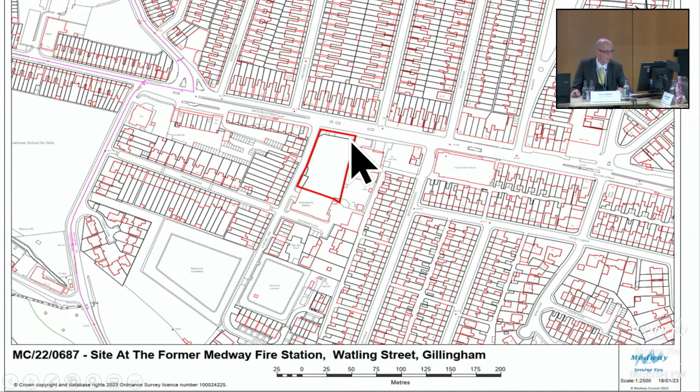An aerial photograph shows that the former fire station has been demolished on the site, but it shows where the access from Star Mill Lane was into the car parking area to the rear.

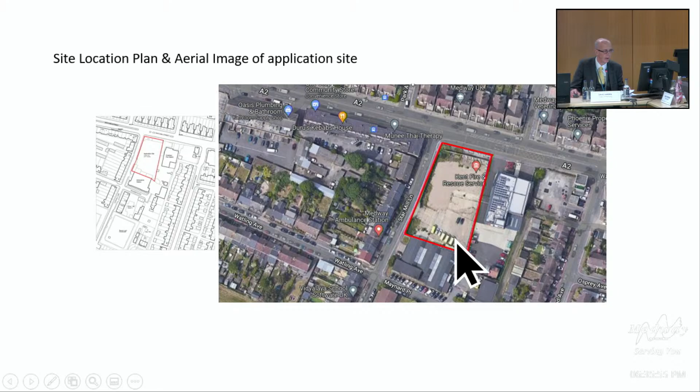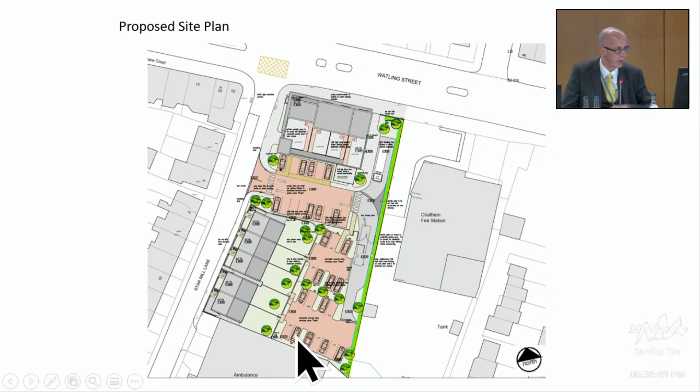The proposal is for a small mini supermarket on the ground floor fronting onto Watling Street, with 4 two-bed maisonettes above, a car parking area to the back with 15 spaces to serve the supermarket, a servicing area, and access to the rear for a car parking area serving the residential flats above, plus 5 three-bedroom properties fronting onto Star Mill Lane. There'll be a gate so that car parking area is restricted to resident parking only, with 18 spaces serving the 9 units. Here's the floor area.

That's the small supermarket just in there, with the car parking area to the rear. We feel the 15 spaces are adequate to serve a supermarket of this size. People parking there will walk around to the entrance of the supermarket.

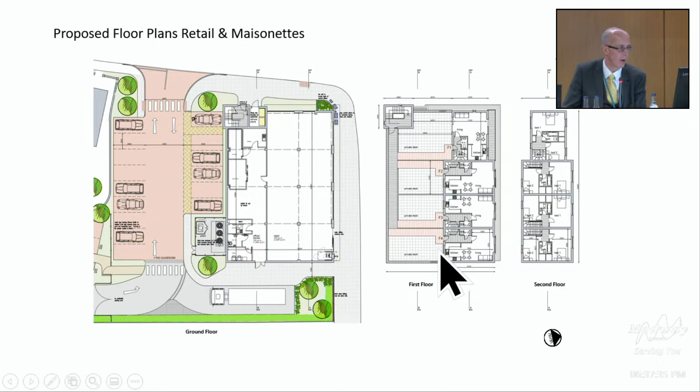In terms of the maisonettes above, there'll be a stairwell coming up to the access at the back. They're spread over 2 levels with two bedrooms, and each will have a small amenity area to the rear, common in maisonettes such as this.

Looking down Star Mill Lane, there's a terrace of 3 properties and a pair of semi-detached, all 3-bedroomed, with gardens that meet our standards in terms of amenity.

In relation to design, the photographs show that the parade on the opposite side, which is 3-storey with retail on the ground floor, is reflected here with the maisonettes above.

And then you've got that amenity area just to the rear here, and that's where that stairwell is. So we think it fits in with the general street scene, provides a good level of amenity for prospective occupiers, and the access and car parking is suitable to serve both the commercial and the residential, meeting our standards as well.

All the car parking for the residential will have EV charging points, with a third of the commercial having EV charging, with the remaining two-thirds having the passive provision, i.e. they have the potential for EV charging in the future.

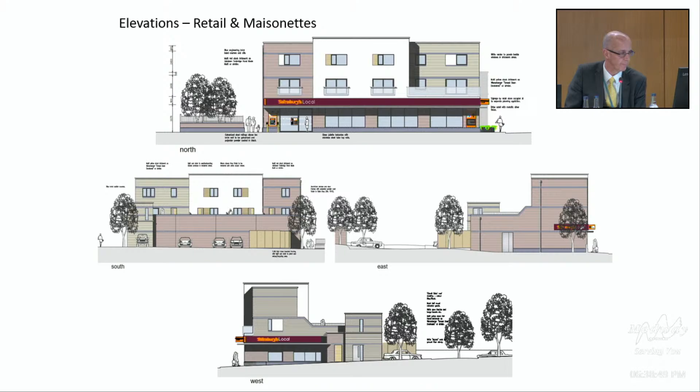Then going to the elevations of the houses, that's the elevation fronting onto Star Mill Lane. We feel that design is appropriate, two-storey, to fit in with the street scene, and the materials, which will be controlled by condition, will ensure that it fits in design-wise.

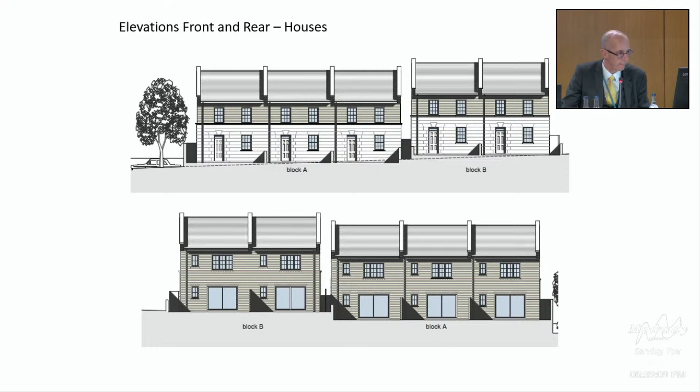And then some street scenes. So that point I was saying in terms of the existing parade here and how you can see that crosses Star Mill, that height-wise it fits in, and then you've got the fire station here and the Camping International just down there. So it fits in with that Watling street scene, and then you can see the street scene going along Star Mill Lane, going down to the ambulance station there.

We feel this is a good scheme and will provide for a valuable local facility which meets our policy guidance, and we're recommending it for approval, subject to the conditions as set out, as well as the usual bird contribution. Thank you, Chairman.

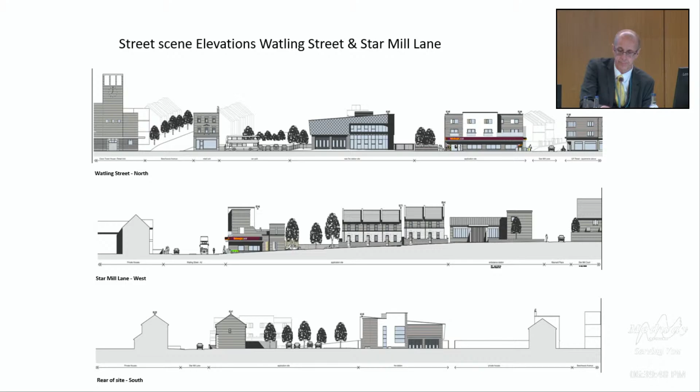Members? Councillor Hackwell. Thank you, Chair. Just a question, really.

How will the car park be policed at the rear? Because there's already car parking pressures along those streets. If you drive up Star Mill Lane, you will only see cars nose to tail parked outside the residents' houses. And as you pointed out in your presentation, there's lots of retail options along that high street for the people. So how will that be managed? Because I just fear it will become blocked with residents' car parking and won't be available for the supermarket.

Chairman, thank you. Good question. It's similar to a supermarket quite close to me down in Wainscott, the Co-op down there, where it's policed by the supermarket themselves. They have signs up, they make sure they've got CCTV, and they make sure that people parking there come in and use the supermarket. So it's policed by them. Notwithstanding that, we do have a traffic management condition, a parking management condition, so they'll need to submit further details relating to that.

I have two councillors who've indicated, Councillor Potter and then Councillor Curry. I think Councillor Crowther as well.

It does indicate - you've shown one example there with very, very minimal landscaping going on, and with some of the renderings it's showing these sort of mature trees, but those trees are fake, aren't they, because they're not actually there at the moment, and they'll take many, many years before they look like a mature tree. So I'd like to see more on the landscaping side of things. Again, not a material reason not to support this tonight, but if your officers could do some work on that, I would appreciate it. Thank you.

Councillor Curry. Thank you, Chair, and thank you very much for the presentation. I'm just following on from Councillor Potter's point, really, on a couple of things. I think this is a very prominent site, and it's really welcome that it's being occupied so quickly since the fire station was moved, which is encouraging. But this is actually, I think the front design in particular, of obviously importance to the area.

It's made of the bricks and materials used in the development, but I think special attention needs to be given to whether it will have a curved frontage on the corner where it turns into the side road, mirroring what's on the other side of the road. A bit more care on the design would have been helpful, and there's room on the front with a wide pavement for some street trees, which would soften the impact of the building. Just a couple of points on the design from that point of view.

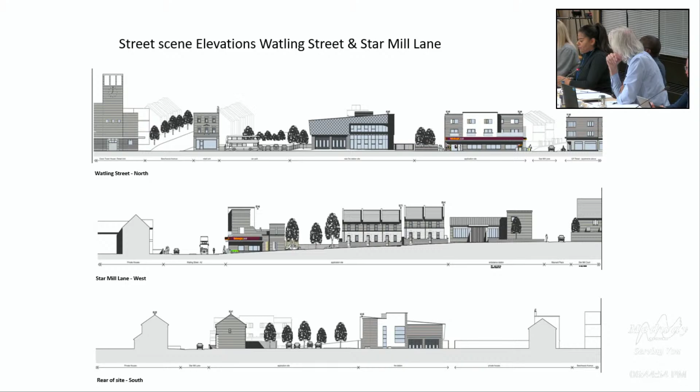Chairman, I understand the point Councillor Crozer is making. We do feel the design is appropriate for the area, and consideration has been given to height and scale. There are conditions regarding materials, and we feel this will fit in with the street scene. If you'd seen the photographs shown further down, the fire station was specifically designed to stand out on its own merits. It's not a conservation area, so there's nothing we need to replicate there. But in terms of scale, materials, and design, I feel it's fine in the area. Thank you.

I haven't got anybody else that's indicated. Can I just raise the issue?

On page 34, it talks about the noise assessment and the delivery noise assessment. What I can't find in the conditions is any hours of operation for the retail use. The only way to control the noise from parking is to control the hours that they... is it there? I've gone all through, and you're going to tell me it's there. All right, okay, missed it.

Thank you, Chairman. This application is for the demolition of the existing dwelling and associated buildings, and for the erection of 20 dwellings, access, parking, play provision and landscaping. This is the site outlined in red, within a residential area, so the principle of residential development there is considered acceptable. This is the aerial photograph of the site, showing its extent - currently occupied by just one dwelling house. This is North Dane Way running along here, Setford Road here, then Lordswood Lane and Swift Crescent there.

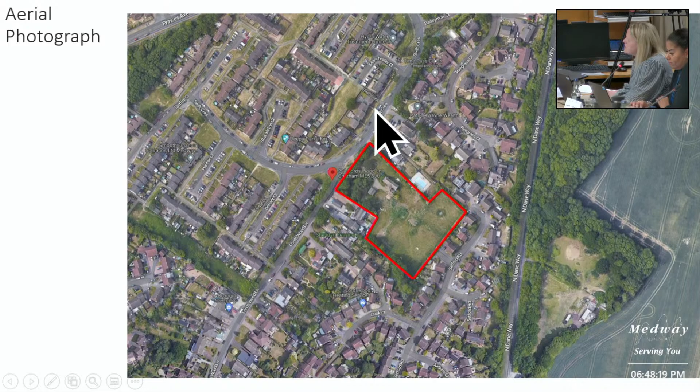Oh, it's quite sensitive, sorry. Oh, I'm going the wrong way. Let me just find myself, there we go.

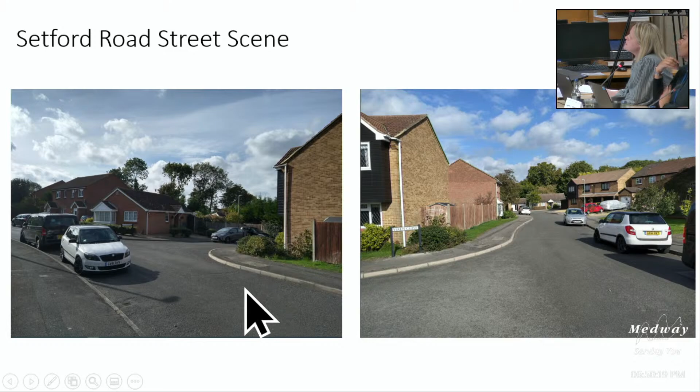And then just in the street scene of Setford Road, so this is Vixen Close, a very small close. This is where the access would be going into the back of the site. A couple more pictures showing Setford Road, Vixen Close off to the left, looking back towards the Setford Road street scene, and then standing looking across to Vixen Close there.

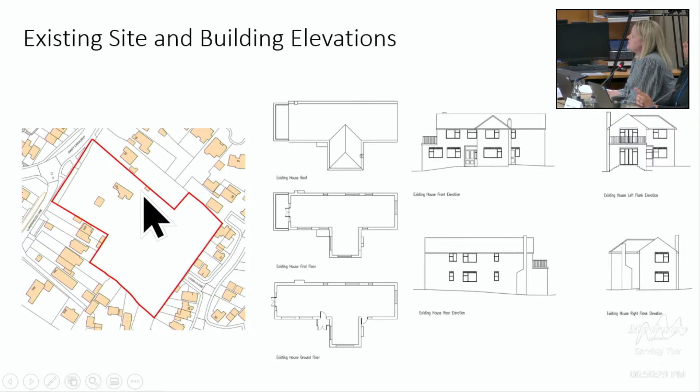And then we move on to the plans where you can see the extent of the curtilage is quite large, so the existing dwelling house there, and this is what it currently looks like, the floor plans and elevations. So it's actually quite hidden from the street scene.

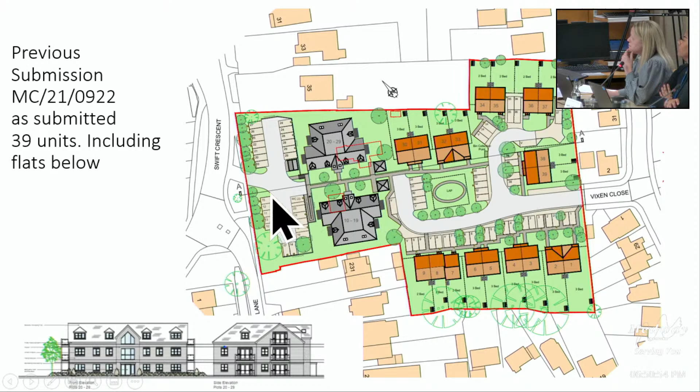This gives you an idea of the starting point when the application first came in for this site. It was a different application, starting with 39 units, 2 blocks of flats, and some dwelling houses to the rear accessed from Vixen Close, and others accessed from Swift Crescent. It was negotiated down to 24 units to try and address our concerns, but we still weren't happy, and this application got withdrawn.

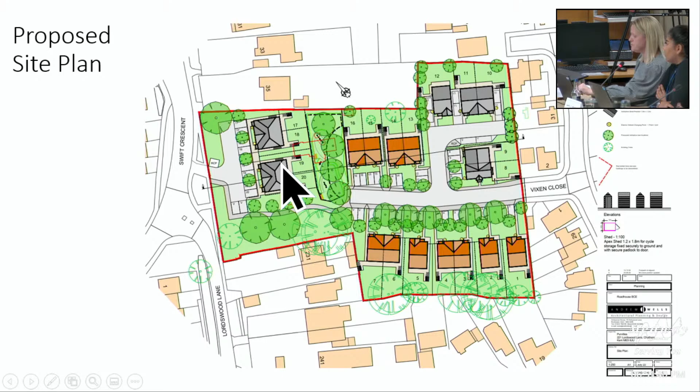Just so it's easier to compare, you can see all 3 schemes side by side with the issues. This one had big concerns with the number of flats and the dominance of parking overall in the layout, and not enough landscaping — we felt there were far too many units on this site. Trying to address those concerns, they removed the flats, but the car parking became even more dominant, with even less landscaping than before. We still felt there were too many units, and the relationship between these properties and this one was too close in our opinion — this is someone's back garden here.

Those concerns were expressed, and we've ended up with this scheme, which we're happy with — no flats to the front, all dwelling houses across the site, as previously said. The landscaping is integrated with the parking so it's less dominant, and there's a better relationship with neighbouring properties in terms of the layout.

All of those rear gardens meet the depths for Medway housing standards. Then looking at building heights, which has been raised as an issue in consultation responses — all the pink ones are 2-storey, and as mentioned, these are split level, 3-storey to the front and 2-storey to the rear. Both are set off the boundary, significantly set off here, but more in line with this one, so it isn't dominating that neighbouring property.

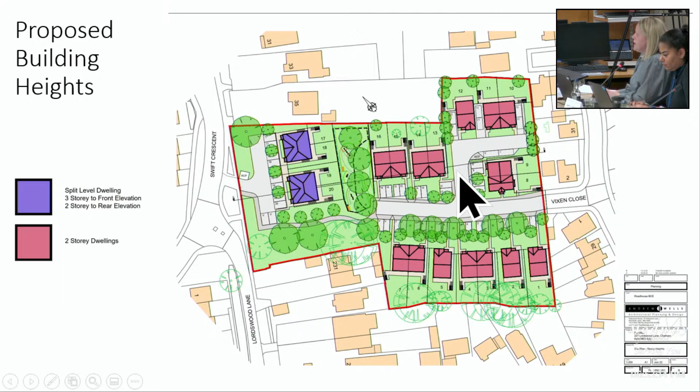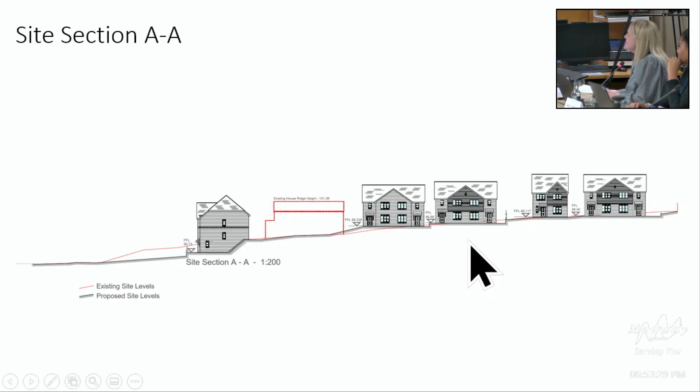My hand, I can't keep it steady, it's too sensitive. But if you can see the red line and then the proposed levels, there isn't a significant difference across the site in the main. The significant difference is down here, but what's happening there is it's at a lower level than the existing line, which is up here.

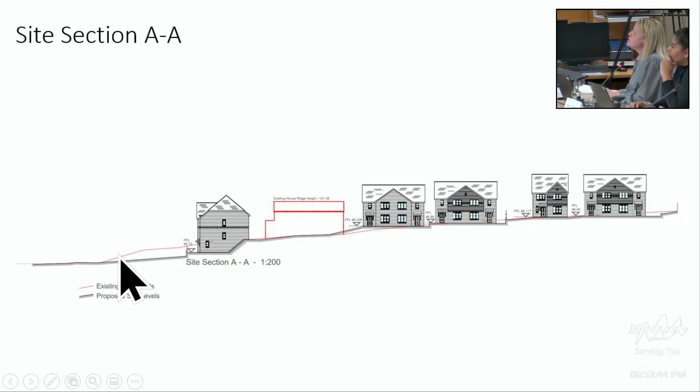And then we move to the elevations. There's a blue cross on each of these to indicate what the elevations and floor plans look like for these properties - plots 1, 2, 5 and 12, 4-bedroom detached houses.

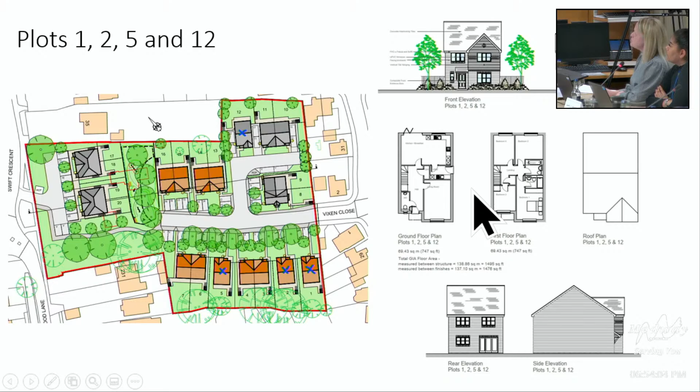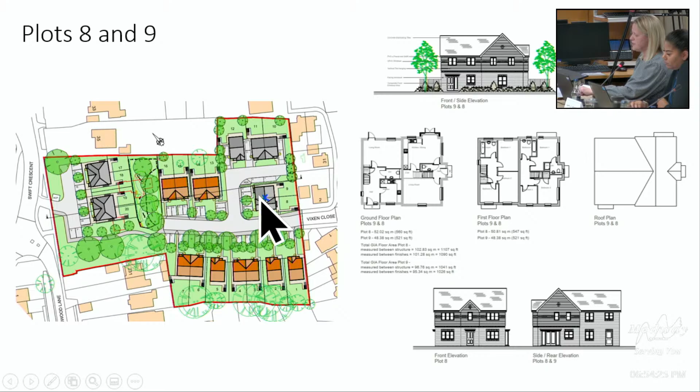I won't read all those, you can read them yourselves, but these are for the next group, which are 3-bed semi-detached houses. Plots 8 and 9 are also 3-bed semi-detached houses - those two there as you come into the entrance.

And then the ones at the front, access from Swift Crescent, are the split level 3-storey, 2-storey, 4-bed semi-detached houses. In terms of design, it's quite varied in the street scene along Lordswood Lane, Swift Crescent and Setford Road. There's no objection from the officer's point of view in terms of housing type and architecture, and they all meet national space standards.

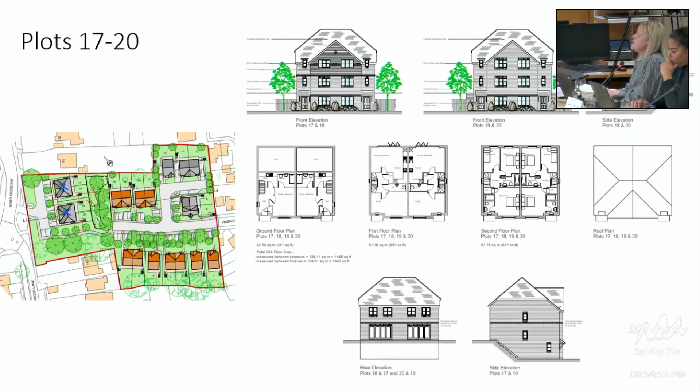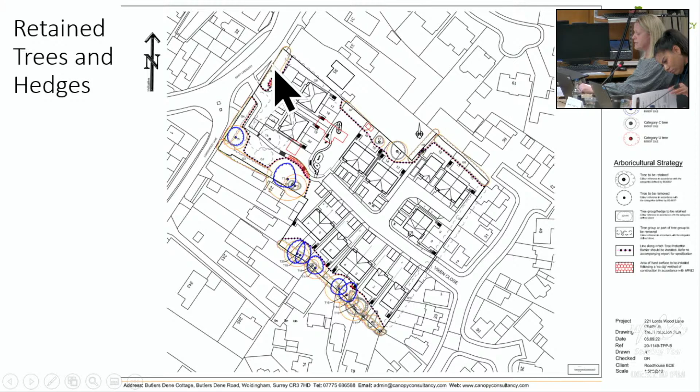There are conditions to require further landscape detail because we want to include more ecological mitigation measures. If you've read the report, there is a loss in terms of the biodiversity net gain calculation, but there are street trees included, and we would be looking for native species in the landscape.

KCC have asked for that to be included in the detail that comes in, required as part of the condition, and there's also a landscape management condition - these areas are to be managed by a management company, so it secures the street trees that officers managed to secure, sitting between the parking and the curtilage of the residents' properties.

In terms of balancing the loss in the biodiversity net gain calculation, we have to balance that against the 5-year land supply issue that the council has, and that carries significant weight.

Taking account of that, the climate change measures and the landscape details to be secured by condition, and the street trees managed separately - secured long term rather than within the curtilage of individual owners - we are recommending approval, subject to completion of the Section 106 as set out in the report, and the conditions as well. Thank you.

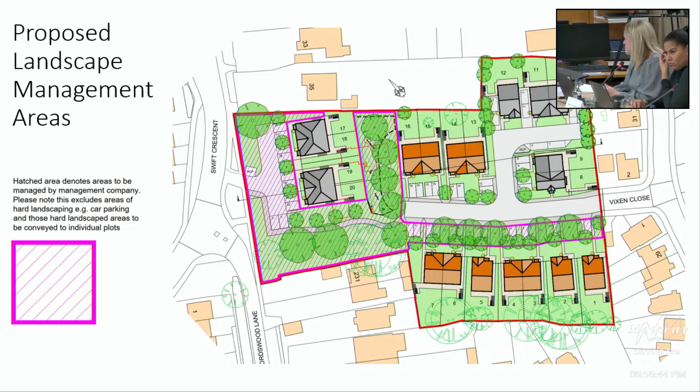Thank you, Carly. Right, I have Councillor Lamas.

Thank you, Chair. I'm very well aware of the over 30 objections that the Planning Committee has received in relation to this site. One of the reasons why I haven't spoken about it publicly before is because I wanted to reserve my opinion for this committee. You will also be aware, Chairman, that in this committee we have a quasi-judicial role, and we have to consider applications based on set criteria, so it's not just the case that I can vote against things in my backyard, so to speak. As a fellow resident of 288 Lordswood Lane, this is a site I know extremely well in Princes Park.

I'd like to ask some questions, if I may, to Dave Harris, the head of planning, just to get his assurance on some of the things residents have raised. And then I'd like to have a brief discussion about Section 106 funding, if that's okay with you, Chair.

The first one is that the trees are crucial for this site to be viable in terms of not overly impacting the street scene. What assurances can you give that the trees, particularly running along Swift Crescent Road and along that southern boundary, will be maintained so that the look of the site won't overwhelmingly change?

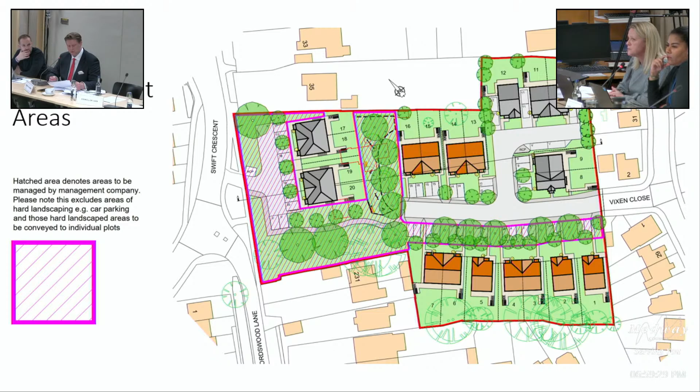The residents of Vixen Close will probably be more concerned about this application than those of Swift Crescent, because that's almost like a close-knit community, and this would be a significant change for them to interpret. However, you'll be aware, Chairman, of Section 106 funding, which is essentially money the developer gives upon completion of the project to improve the local community and mitigate against the effects they may have. That's where my main concerns lie with this application.

Princes Park needs more bins, more trees, and we also have two local issues that need funding. So I'd like to ask what measures can be taken in the Section 106 funding to give less money to far-flung places such as Great Lines Heritage Park, and more emphasis on two local issues: the Kingfisher Playground, in the valley next to Kingfisher Drive, and the Kingfisher Underpass. These are two very local projects needing funding. Could these be a community benefit alongside more trees, more bins, and money for additional school places and healthcare access, as a result of this development if approved by this committee?

Chairman, if I can answer that - I'll discuss this with Carly, but also with Fiona Ledley, who's the Green Spaces officer.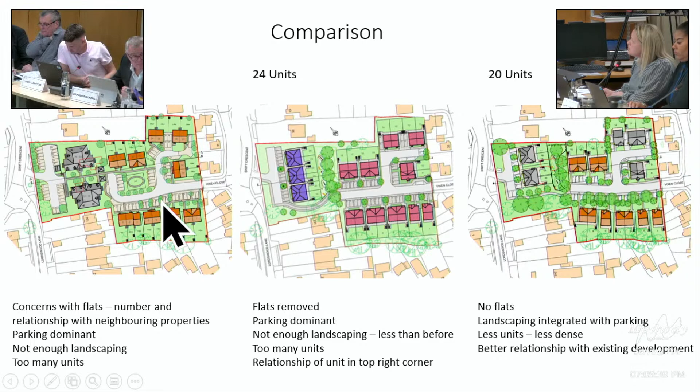It's a bit of a difficult one because, yes, that's what you're referring to, that we've lost. But actually it might be easier to find that scheme. So the current one has more usable space here, which is where the play space was, and we've gained space here.

Whilst we might have lost that, it seems we've lost more because there's actually less car parking dominance here, and we've integrated more landscaping. As I understand it, and Councillor Curry will know more than I do, in terms of BNG in linear form there's an increase, but it's the polygon version where there's a decrease. I'm not sure how that balances out. But could that then be achieved if you reduce the scheme by a couple of dwellings?

Quite possibly, I don't know. That would have to be looked at - it wouldn't be you, it would be the developer who would do that. Whether that makes the scheme unviable or not, I don't know, so that would also potentially come into play. If that's the case, we'd have to get a financial appraisal from them to demonstrate that, but that may be the case. That's down to members to decide whether they're happy with this scheme or want to look at further iterations, if the applicant's willing to.

Chairman, if I can add to that - Carly's put it very well, and this is a really good plan. You can see that the 20 units scheme, with the additional tree planting achieved there over the 39 units, the BNG must be greater for the current scheme. There may be potential for some additional gains in the public realm area - the area that will be managed by the management company - so we can look at that.

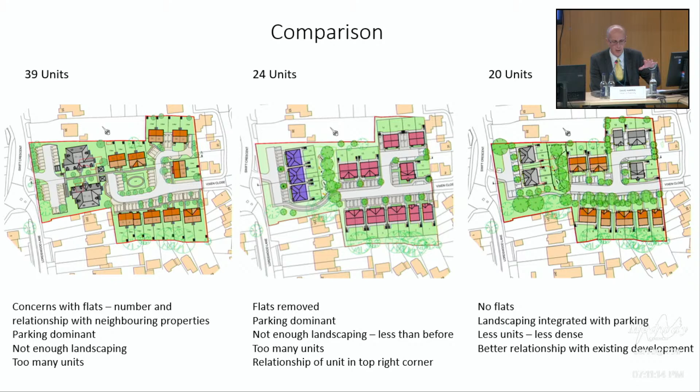But what I would say is that the requirement for 10% biodiversity net gain isn't in force yet, so that weakens that argument. I think Councillor Curry made a very good point, and Councillor Lammas as well, about taking that public realm contribution and using it for additional tree planting in the immediate area, which will help from a BNG point of view.

Moving forward, just to let members know, as we get towards the requirement coming in November for 10% gain, we're working very hard with KCC Ecology. Along with other Kent authorities, we're paying for a BNG officer who's now in post, just started a week or so ago. I'll be meeting them shortly to talk about not only on-site BNG and how we can best deal with that, but also where there are sites where you can't achieve at least 10% BNG on-site, where we'll look to get off-site provision to offset that. Hope that's helpful, Chairman.

Chair, could I just quickly come back - with reference to this specific site tonight, have we had those conversations with the developer to say, actually, you're very close to meeting the net gain requirement with the biodiversity, and if you just came back with a slightly different proposal, you would be there on that? Do we know if they would be willing to do that?

I don't know if officers specifically had that conversation, but conversations have gone on over time in terms of the amount of landscaping they've produced, and the difficulty is what Dave said - the Environment Act doesn't come into force until November 2023, so we can't make them do it at this stage, and they've gone so far as to provide a scheme that we as officers are happy with. So we think the balance is right, and it's up to you to decide whether you agree with that.

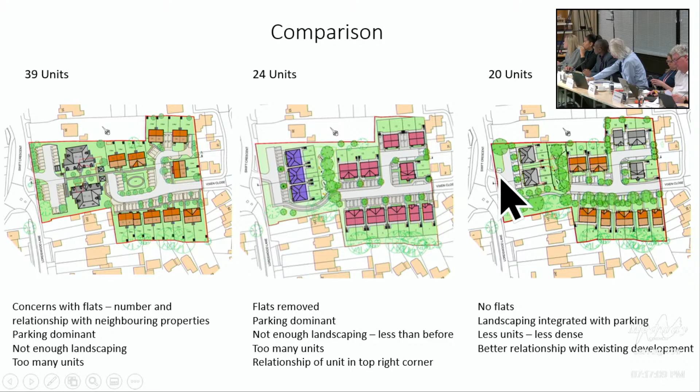On a point of clarity, Chair, if I may, I think what Councillor Crozier is suggesting, which is correct, is that everyone who comes out of the access to Vixen Close will have to drive around in a crescent moon shape, and to get to Morrison's they'll have to go right to that junction. So whichever way they're coming out, which is why my concerns are over that slippery part, they will all encounter that on their way to Morrison's. Yeah, that wasn't my assumption, but I do take that point. But do highways consider the safety of that junction, because it's a slippery junction?

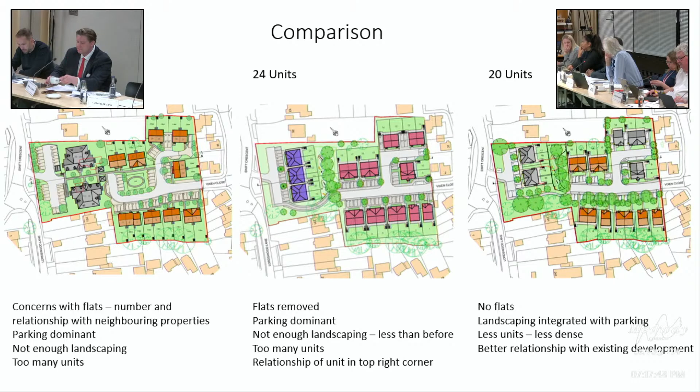I think if there's a concern about slip, I mentioned about putting some anti-skid surface in that junction. But looking at it, I didn't think there were any defects in the road. But if we're concerned about slips and things like that, I think anti-skid surfacing, which we can use as a Section 106 contribution, could actually improve the physical characteristics of the road. Thank you.

Councillor Hackwell. Thank you, Chair. I have a very good friend who lives just a few numbers up from there, so I do use that junction a lot, and actually I think Swift Crescent is ten times worse because the hill's a lot larger. I think it's just a small, tiny little depression. I think the road network there is built in a big valley, all the roads are very steep. I don't think there's a particular concern. I accept your concern about the end of that road, but all the roads around there are very steep, and in snow and ice there are lots of accidents because people drive too fast, normally.

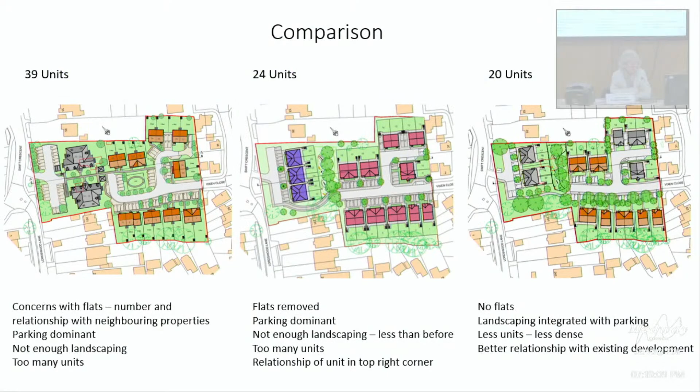I don't have anybody else who's indicated. Just to comment on the fact that we have the comparison chart in front of us - it's very significant, because if you look at what the applications started at and what has now transpired, it's really quite different. It's much, much greener, and I'm not always sure open spaces add that much to biodiversity - sometimes they become scruffy - whereas there's a plan here to maintain these trees because they'll be under a management company. So I think what we started with to what is now before us is a significant improvement.

I'm going to move to the Vice Chairman.

Thank you, Madam Chairman. Colleagues, I take account of the debate, which I think has been very helpful, particularly concerns on the 106 and the sensible need for some more attention to highway and safety issues. So I will move the recommendation, but with some amendment which may incorporate the views reflected by members in the debate. I move recommendations subject to Section 106 before us, but with the following amendment to Section 106, Roman numeral 9, which relates to public realm improvements.

I would amend that to read that they be devoted to areas in the vicinity of the application site, including the potential use of anti-skid surfacing on the highway and incorporating measures to enhance the general safety of the locality. In addition, because it was made earlier and rightly so, the detail of that be subject to professional views and consultation of elected members.

And finally, to make it clear, as we're coming into that dreaded run-up to the 4th of May, that if there has not been an agreement concluded, then the relevant ward members be the 2 new members for Princes Park if there is no agreement by Tuesday the 9th of May.

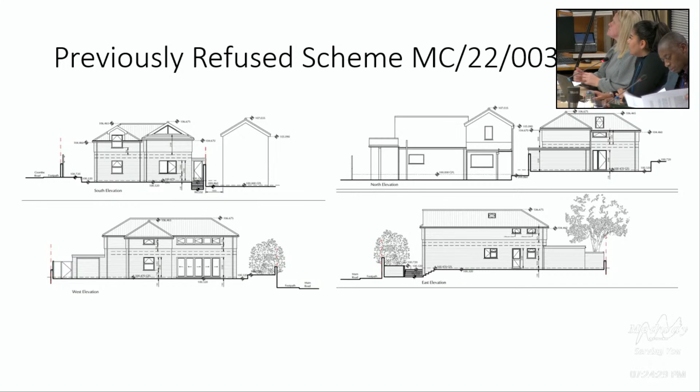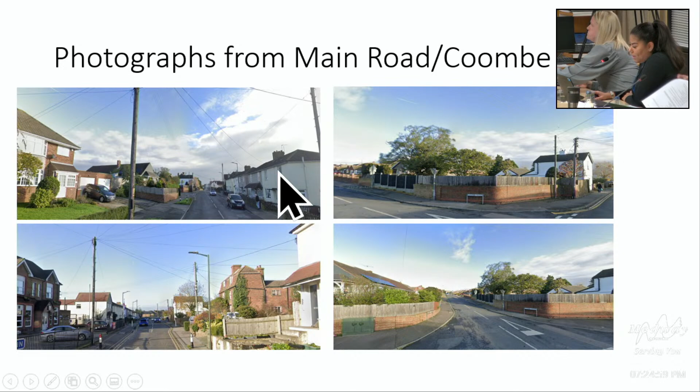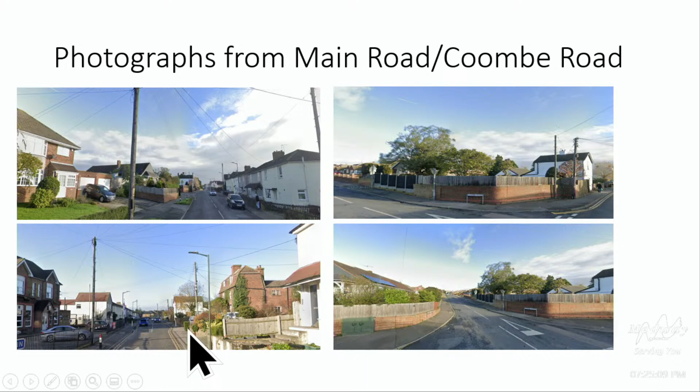So these are some photographs of the area. This is the view from the west, looking down towards the proposal site - this is 42 Main Road here. This is from the east of the site, again you can see 42 Main Road here. You can't really see the proposal site from this side, but just to compare the sizes of the dwellings within the area.

This is the site location within this corner plot, and this is views up towards Coombe Road. So within these photos you can see the relationship between the bungalows within Coombe Road and the two-storey elements along Main Road.

And then these are just some photographs from inside the site. So again, that's 42 Main Road, and this is the corner junction here looking out towards Main Road and Coombe Road here.

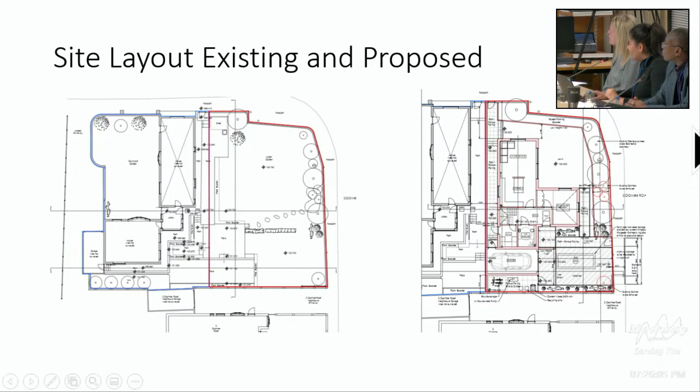Going on to the site layout, this is the existing site layout demonstrating the garden area for 42 Main Road. This is the proposed site layout demonstrating the ground floor, the garden area and the parking provisions within the garage and to the front of the garage there. And this is the access that leads out onto Coombe Road.

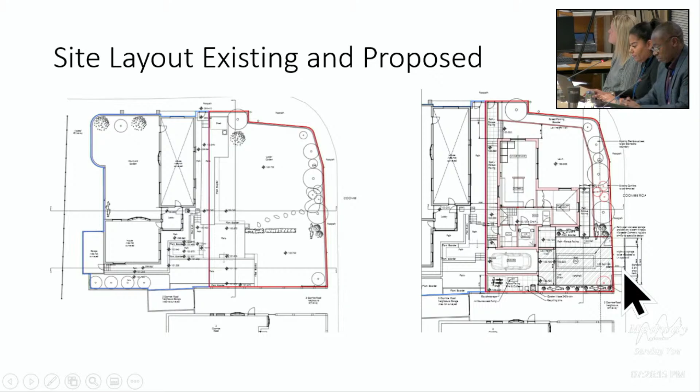Going on to the proposed floor plans. The ground floor would comprise of one bedroom here, a shower room, open plan kitchen, living and dining space. The first floor will comprise of a master bedroom with ensuite and a study on this side.

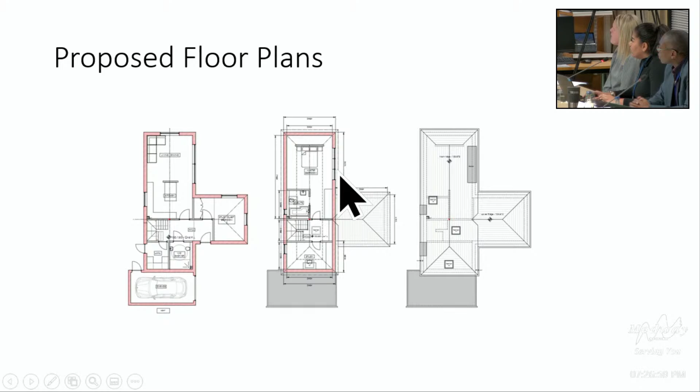In terms of windows and overlooking, these windows have been conditioned to be obscure glaze to mitigate any overlooking into 42 Main Road. And this main window here that serves the master bedroom would overlook the proposed garden of the proposed dwelling.

So here are the elevations when viewed from Main Road. This is 42 Main Road here. These lines helpfully demonstrate the previously refused application. This was a second amendment, which was then further reduced to what you see here.

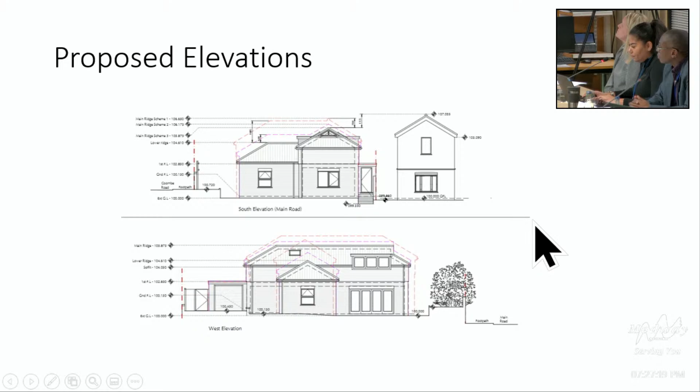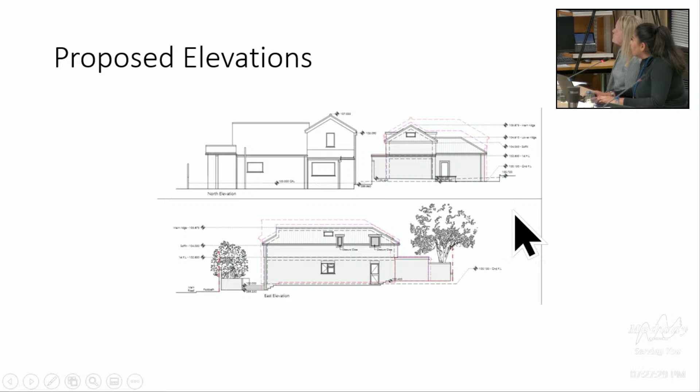This is the view from Coombe Road towards the site. And these are further elevations, the northern elevation and the eastern elevation, again demonstrating the previously refused elevations there.

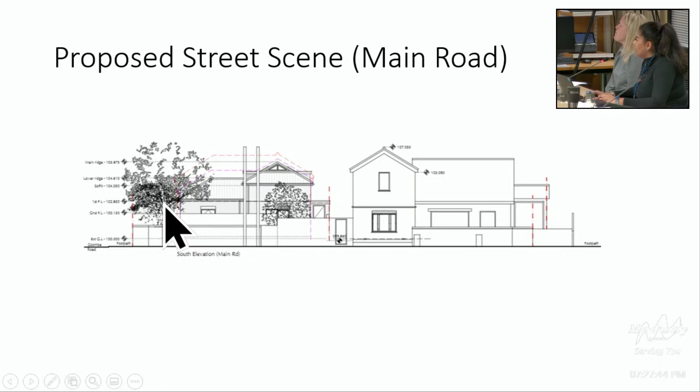And lastly, these are the street scenes. So again, this is 42 Main Road, so just showing it with the boundary treatment and sort of the landscaping that's proposed there. And again, from Coombe Road, demonstrating the relationship between the bungalows there, again, with the boundary treatment and the landscaping.

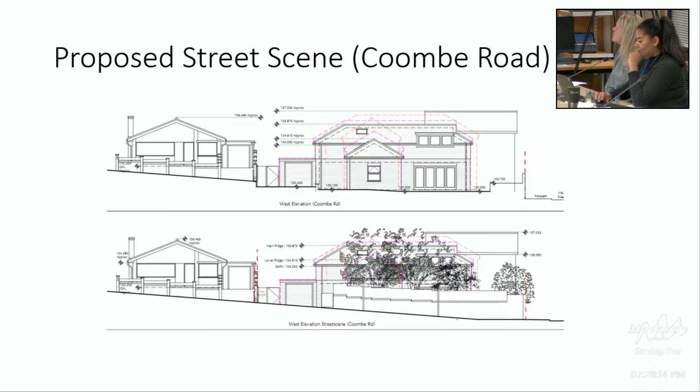Just on to concerns that were raised through letters of objection. As previously stated, the supplementary agenda details the objections from the Parish Council and Councillor Pearce. One of the issues was over-development of the site.

There have been two previous approvals on this site under outline applications for proposed bungalows. When looking at the buildings within the plots, especially within the street scene, the proposed site arrangement is comparable to those on the adjacent side of the road.

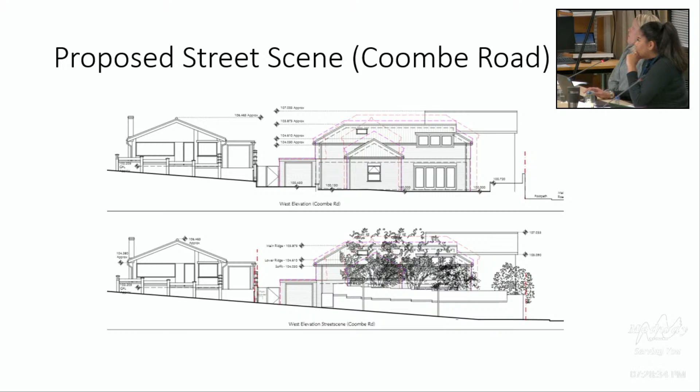So if I just flick back to the site location plan. The proposed chalet bungalow would be set back from both Main Road and Coombe Road, and it wouldn't appear cramped within the plot. As such, it's not considered that the provision of a 2-bedroom chalet bungalow would constitute overdevelopment of the site.

Another main issue that was raised was the relationship with 42 Main Road. It's been listed within the objection that it's a non-designated heritage site. The conservation specialist didn't comment on this planning application, but they did provide comments for the previous application, in which they determined that it was not a non-designated heritage site, and as such there was no requirement for a heritage assessment to be submitted with this application.

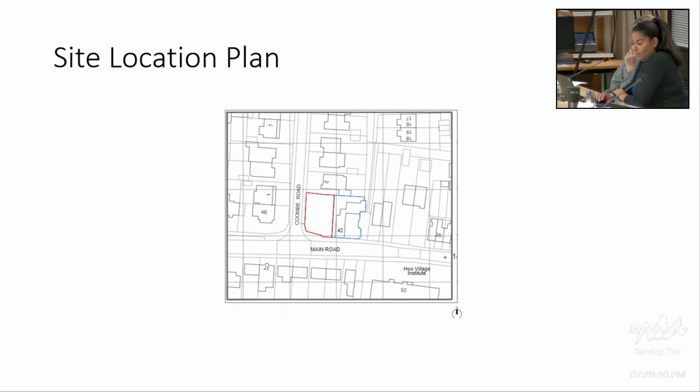So there was no objection raised in terms of heritage grounds. As a result, the application is recommended for approval subject to conditions.

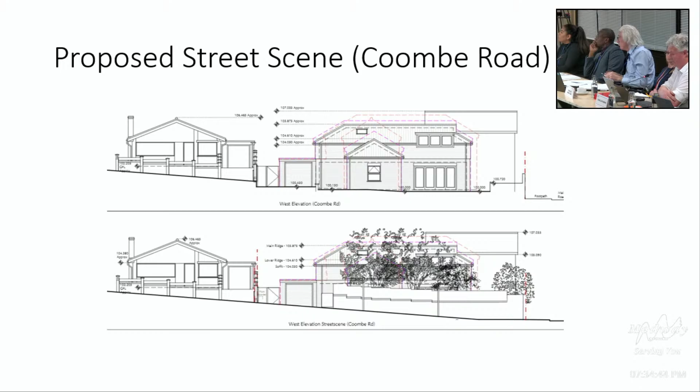Thank you, I concur with Councillor Buckwell. I've just been looking up the reasons for refusal from last time, the decision notice given, which was the result of the committee's determination, and I don't think the issues have been addressed. I know we've had a drawing that shows it outlined, I think in purple — that one there — but it's actually more contrived than it was before. And as you say, it's not a bungalow, it's something more than a bungalow. So I will be happy to support the wording if it is similar to the previous refusal.

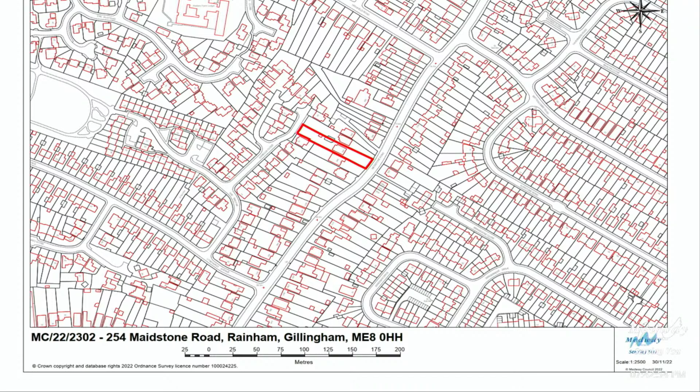Thank you, Chairman. This application is a resubmission of a previously refused application determined under delegated powers. The previous refusal reasons were the impact on occupant amenity due to inadequate outlook and the lack of justification of the potential harm caused to trees within the grass verge.

This is the site. This is at Maidstone Road. This is 254 Maidstone Road here, and this is Coombe Road where the proposal will be accessed from. You can see from the aerial image the relationship between the dwellings on the two roads and how the existing plots have been subdivided. What did I say? Coombe Road? Apologies, Camellia Close.

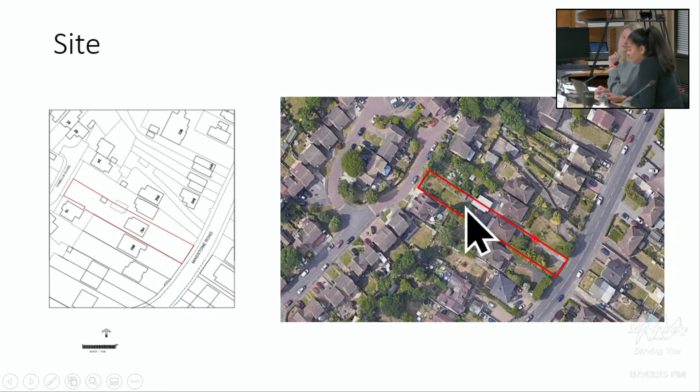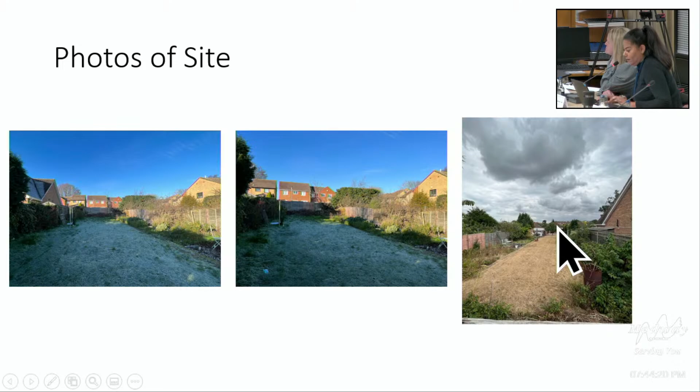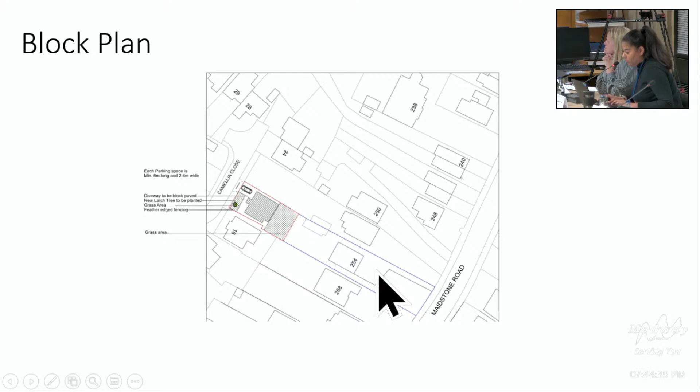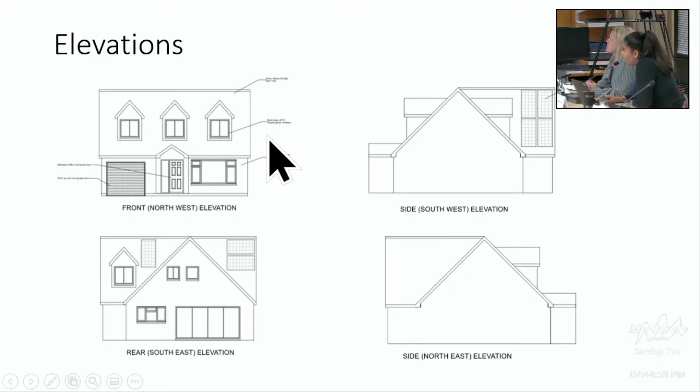The proposed development meets with technical housing standards, so there's no concerns in terms of occupant amenity with this application.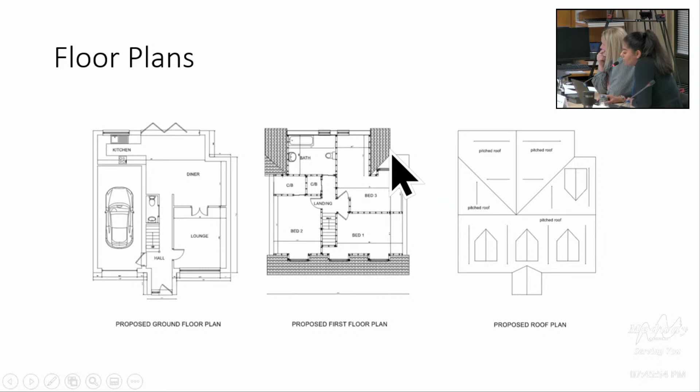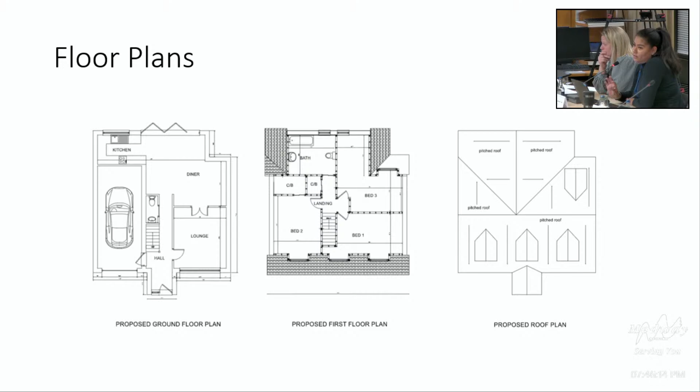Concerns have been raised in terms of overlooking and impact on neighbouring privacy. The proposed dwelling would be approximately 27 metres from the dwellings on Maidstone Road, and in terms of neighbouring amenity of 16 Camellia Close, it would only be this window here that serves bedroom 3 that would result in any overlooking. But considering that it is a residential area at present, it's unlikely that overlooking from that window alone would cause detrimental harm to neighbouring amenity. And there's also mutual overlooking from numbers 14 and 16 into the neighbouring properties as well.

Moving down to the street scene, so you can see the relationship with 16 Camellia Close there. So going on to issues that are raised through letters received.

Objections were raised in terms of parking standards and whether the proposal would meet parking standards. There is one space provided within the garage and one space provided to the front of the dwelling house, which would meet with Medway's interim parking standards for 2 spaces for a development with 3 bedrooms.

There were also concerns raised regarding newts within the neighbouring properties. The location of a pond wasn't identified within these letters of representation. However, taking into consideration the proposal site currently serves as garden space for 254 Maidstone Road, and it is maintained as a garden space, it's not considered that the proposal would impact on the newt population.

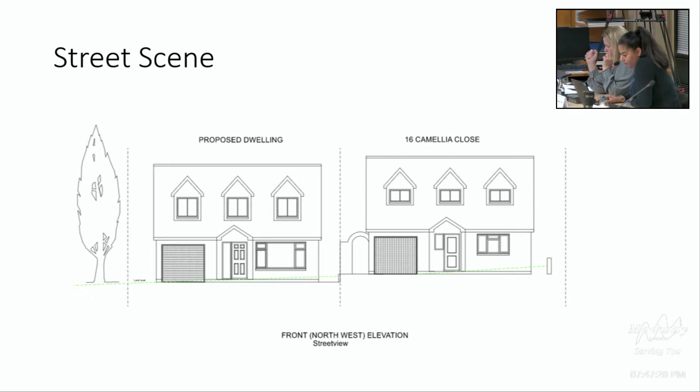And lastly, as previously noted, there was a tree within the grass verge which was removed subsequently because of the previous refusal.

It was considered on the previous application that the large tree that you can see shown here provided visual amenity within the street scene. After some further investigation, it was found the land was privately owned, as was the tree. However, the applicant has agreed to replanting of a tree to mitigate the loss of this large tree, and this has been secured by condition 13 as per supplementary agenda.

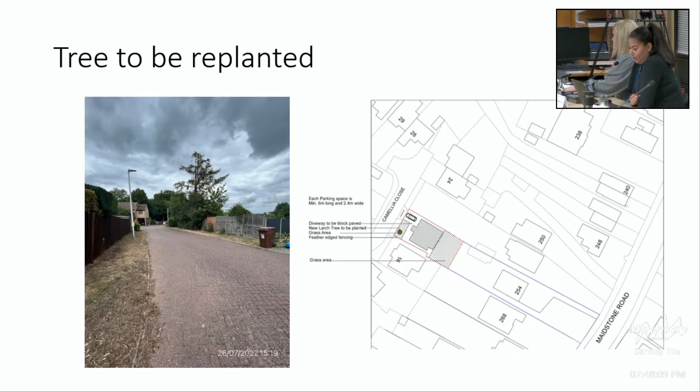And the proposal is recommended for approval with conditions as set out. Thank you. Thank you, Councillor Buckwell.

Thank you, Chair. I'm not normally in favour of back garden developments, but looking at this particular proposal, it seems as though this particular back garden and the neighbour's back garden were not sold at the same time as the rest 20 odd years ago when Camellia Close was built. I'm sure if the then present owners had actually acquiesced and sold their part of the back gardens, there would already be houses like this. And as they're trying to mirror the neighbours, I don't have an issue with this application at all, and I will be voting in favour of it tonight. Thank you.

Thank you, Chair. Yeah, I'm on the same lines as Councillor Buckwell here. I feel that even if we did refuse it, I can't see the grounds that we could refuse it because the house next door is exactly the same, so it's just mirroring at the same time. So I'll be approving this.

I don't have anybody else who's indicated.

Chairman, just if it helps Councillor Buckwell in the recommendation, I would like some delegated powers in relation to condition 13, only because having just read it, it doesn't require the tree to be retained and maintained. Oh, it's on the replacement, sorry, so we need to refer to supplementary advice on that. I know, but there's no reference to supplementary. Sorry, so I'll draw Councillor Buckwell's attention to supplementary agenda advice on that. Thank you, Carly.

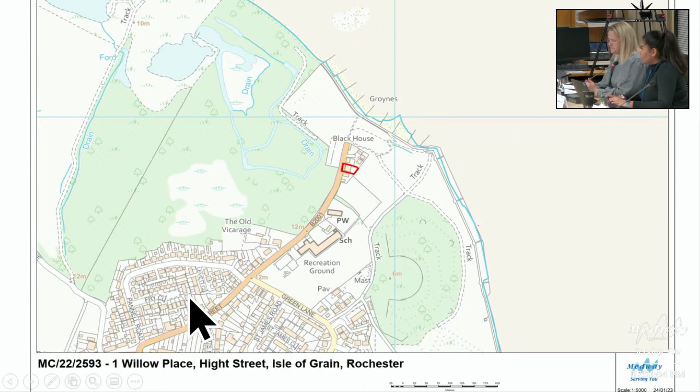This application is 1 Willow Place, and the application is for the change of use of a C3 residential dwelling to a C2 care home facility for children. The site is located within the rural settlement of Grain, with Grain Coastal Park to the north of the site, and St James's Church and St James's Primary School to the south of the site.

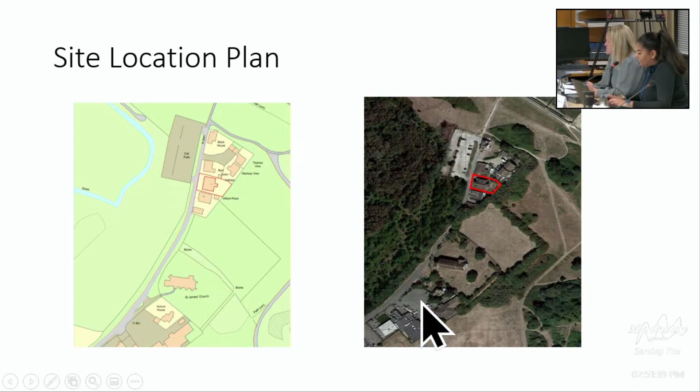In terms of elevations, there are no proposed external changes, and there aren't any elevations submitted with this application. There are also no physical internal alterations. However, the room that states games room was previously a bedroom, and the room that states office was previously a bedroom, so it's only the change of use of the rooms in terms of internal alterations.

The use class C3B allows for up to 6 people to live together as a single house receiving care. The reason planning permission is required in this case is that although the occupants would live as a family, the level of care required to undertake daily tasks, and the level of staff required to assist in those tasks, would take the proposal outside of the C3B use. Therefore, it defines as a C2 use.

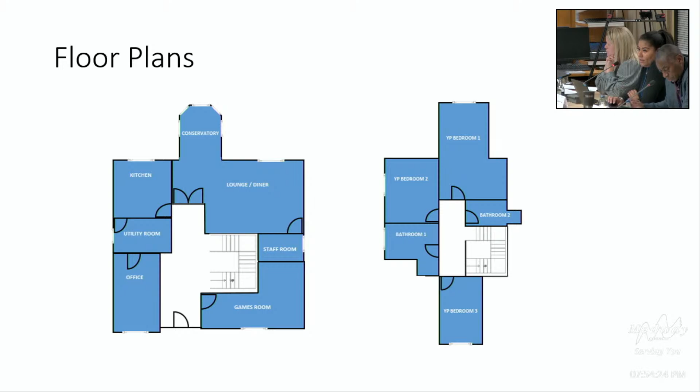Concerns have also been raised in relation to parking. As previously stated, there are 4 parking spaces provided within the site, and there is also the public car park adjacent, so any visitors could potentially use that. In terms of the people who occupy the dwelling, the children are proposed to be aged between 11 and 18, so it's unlikely they themselves would have vehicles. So it's unlikely the proposed development would go above and beyond the comings and goings of the existing use, which is a 5-bedroom dwelling house.

In terms of amenity, as there are no external changes, there's no additional harm in terms of loss of outlook, impact on privacy, or overshadowing to neighbours, but concerns have been raised in terms of additional noise. As previously stated, there are 4 members of staff there during the day and 2 at night time, and these are trained staff that will monitor the children. The proposed dwelling is detached, and taking into consideration the previous use as a 5-bedroom dwelling house, it is not expected that the level of noise generated by the 3 children would be considered outside that of the C3 use. Therefore, it's not considered that the proposal would cause additional impact on neighbouring amenity.

Concerns have also been raised in relation to the loss of the residential house.

Policy H2 relates to the retention of housing. Policy H8 relates to the change of use of properties considered too large for occupation by a single household. And policy CF2 supports the introduction of new community facilities subject to amenity, access and size of the dwelling.

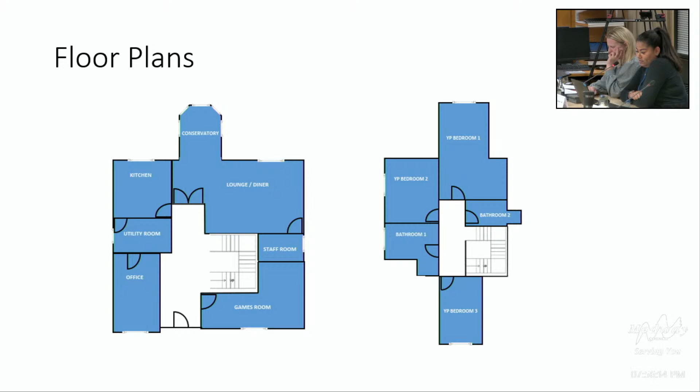Whilst the proposal would result in the loss of a large single-family dwelling house, it would still reside in a residential use as the care home facility, and the proposal would provide a much-needed community facility. There were also 3 letters of support received, stating that the community facility would be a welcomed addition to the area. As such, no objections or concerns are raised, and we are recommending approval as set out.

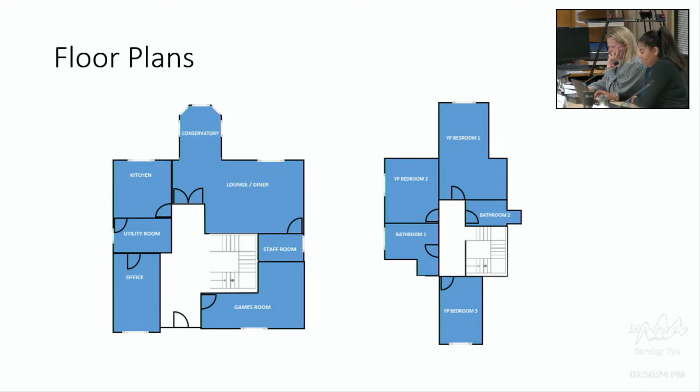Thank you. Councillor Tranter. Thank you, Chair. I shall agree with the officer's recommendation on this.

It's interesting, and I'm slightly disappointed at some of the reasons for objection - an assumption by some people that these children are going to be antisocial or noisy, and the fact that the parish council consider it a loss of a family dwelling. To my mind, as made clear in the presentation, it's still residential use. This is still a family, albeit for some reason these children can't be with their birth parents, but they deserve as much opportunity to live in a residential area. They've got to be somewhere. I'm slightly offended at where people think children are going to live if this is not suitable. The issues about parking and so on, I think, are trivial, and I hope this is well managed, and whoever lives there enjoys living in that village and will be welcomed by people there. Thank you.

Right, I have 3 members: Councillor Hall-Croft-Scott, Councillor Buckwell, and then Councillor Hackwell. Councillor Hall-Croft-Scott. Thank you, Madam Chair.

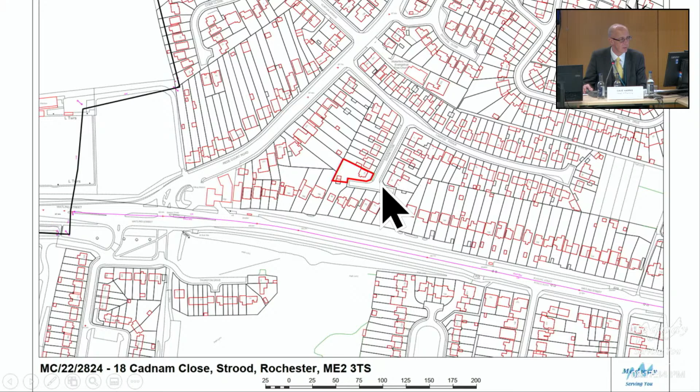Thank you, Councillor Curry, Chairman. As members know, the only reason this is coming before committee is because the applicant is a councillor. There have been no objections to this application. This is the application site, within a cul-de-sac, right on the corner. At the moment there is a conservatory to the side, which is proposed to be demolished, and in its place a single-storey side extension constructed. It doesn't cause any overshadowing or overlooking of neighbouring properties.

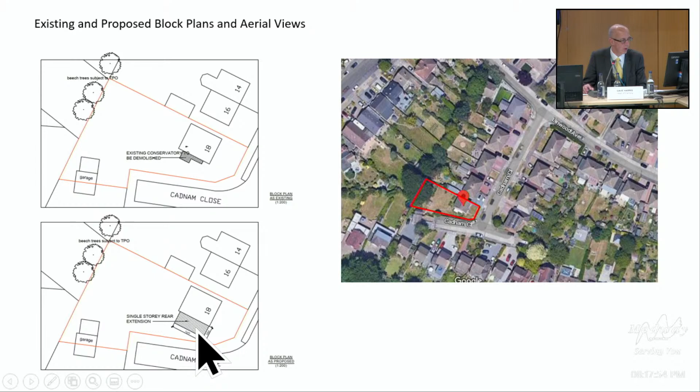The windows will be, well, you'll see the elevation. This is the property. That's the conservatory which is rightly going to be removed, and this is the proposed property. You've got a utility room to the rear, bedroom to the front with a window, side window to a shower room, and a window to the back. It's a standard design for a single-storey extension, very small in scale, doesn't cause any car parking issues, and there's no overlooking, loss of amenity, or overshadowing of neighbouring property. It's recommended for approval.

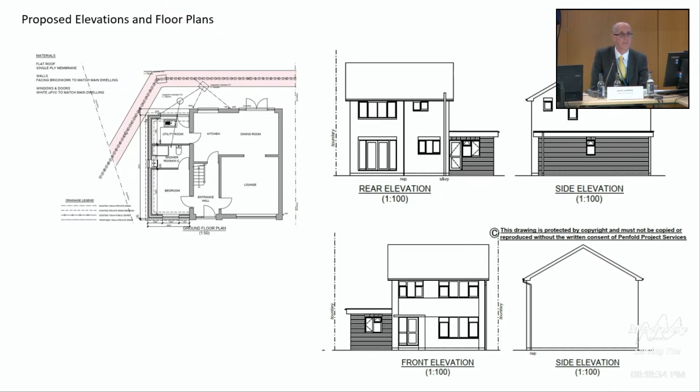Thank you, Chairman. Thank you very much. Is there any member comment? Okay, I have no comment. So in the absence of a vice chair, I move that we approve with conditions 1 to 4 agenda item 10. All in favour? Is that seconded? Yeah, thank you. Approved, that's 4.